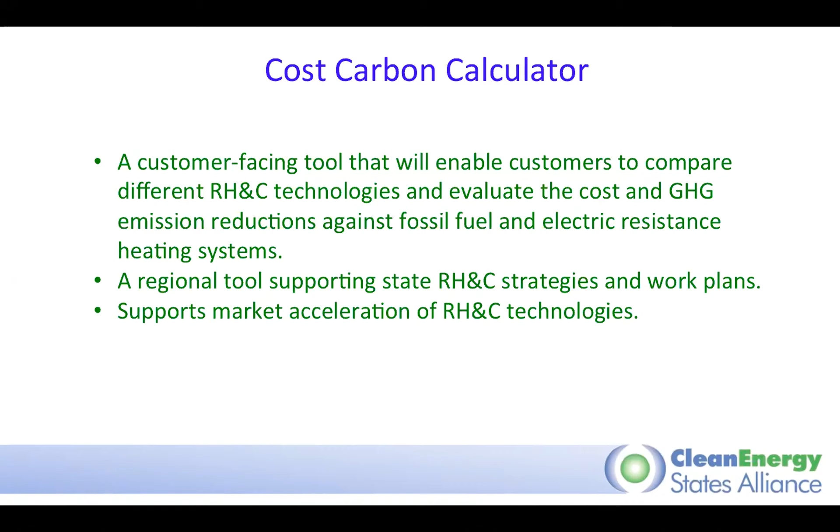The tool primarily, we think, is going to first be used in what are known as Heat Smart or Thermalize community campaigns. And those campaigns, if you haven't heard of them before, are based and built on the very successful and popular Solarize campaigns, which are outreach strategies that tap into the power of communities to increase consumer awareness and then help reduce installation costs and often offer a bulk purchase cost to equipment.

And so some of our members, particularly New York, NYSERDA, and MassCEC, have launched either what they're called Heat Smart, or in New York, it's called the New York Clean Heating and Cooling Communities. And these communities are working on these community bulk purchase campaigns.

And so the vision is that this cost carbon calculator would first be a helpful tool for these consumers to help them choose what kind of renewable heating and cooling technology would make sense to place in their home. It would also be a tool that installers would be encouraged to use and could approach a homeowner to help them compare the costs and the benefits, the carbon reduction benefits of installing a renewable heating and cooling appliance in their home.

The tool will have various inputs and assumptions, and since we're just getting started on this work, we still have yet to figure out whether we will have one set of inputs and assumptions across the region, or if we can make the inputs and assumptions different for different regions and different states. And so the group will be working together and will be working with one or more consultants to develop the tool.

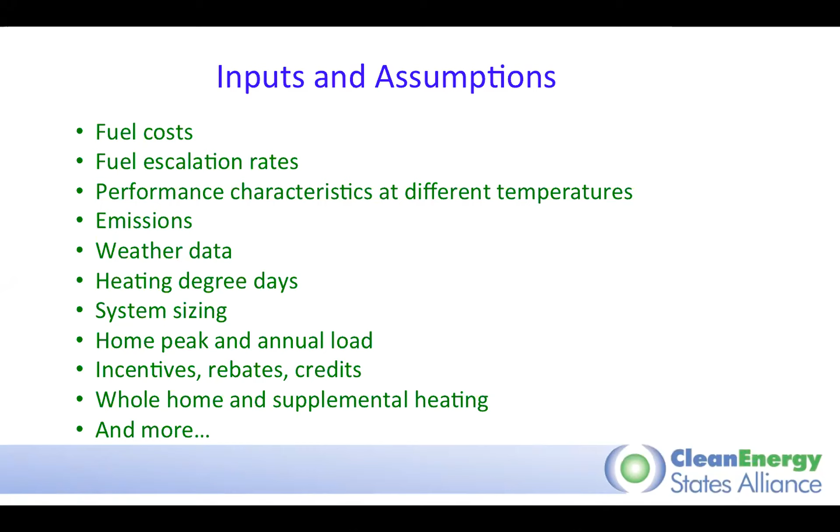So anyone will be able to go online, enter some variables like the size of their home, the current heating system they have, how much it costs to currently heat their home, and to help them choose what kind of renewable heating and cooling system might make sense for them to install. So we really see this as a tool that will help accelerate the market adoption of renewable heating and cooling technologies. So that is our proposal and our project in a nutshell.

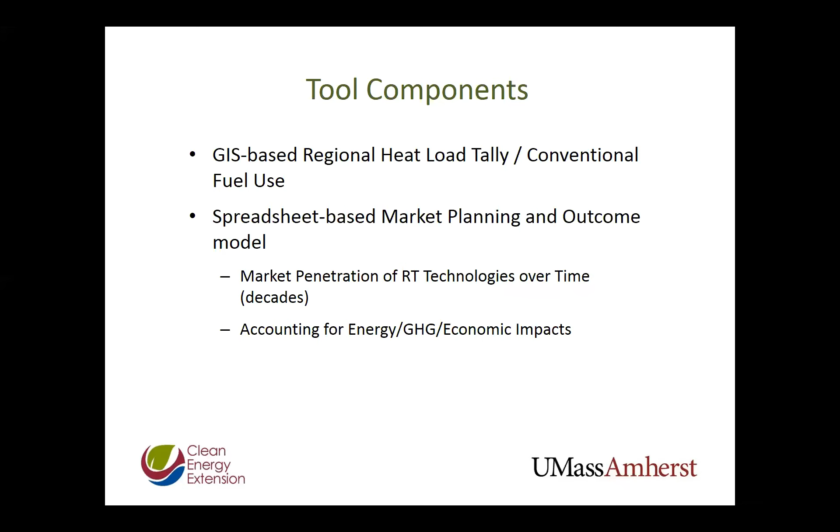First is really outside the Excel model itself: what we have currently is a GIS-based methodology to look at a region and tally up the heat load across different building sectors in that geographic area. And then a spreadsheet-based market planning and outcome model that looks at the market penetration, exogenously input by the user, that wants to be assumed for the region over time, and then an accounting of what that means for different technologies for energy, greenhouse gas emissions, and economic impacts.

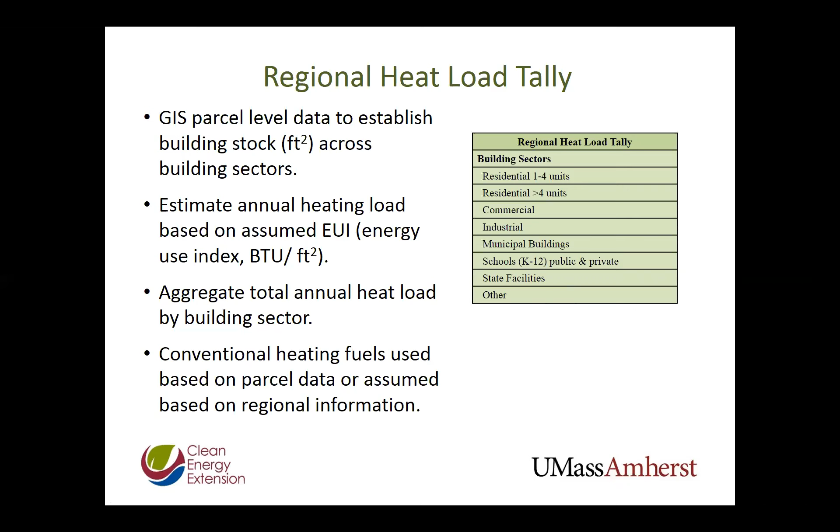Just briefly going through this, the regional heat load tally looks at parcel-level data from GIS and estimates heating load from those various building sectors and aggregates those to come up with a total heat tally for that geographic region. We currently do this with GIS. We want to make that a little bit more template oriented, so anybody can essentially get through that process.

Let me first talk about the treatment of market penetration in the spreadsheet model. The model applies a user-specified or exogenous market penetration. It's really a what-if tool. That is not a prediction of market penetration, but what is the outcome for the region if we go forward with market penetration of so much of different types of renewable thermal technologies into these building sectors.

The model currently is, I would say, limited to two renewable thermal technologies, aggregated together. One is heat pumps. And I'll get to what we plan to do to extend the model, but at this point we have the heat pumps aggregated into a single type of heat pump based on a COP. Second is wood heating. Modern wood heating, differentiated by chips, bulk or bagged pellets. And also, at least for the purpose of Massachusetts and greenhouse gas accounting, whether the feedstock is coming from residues or thinnings.

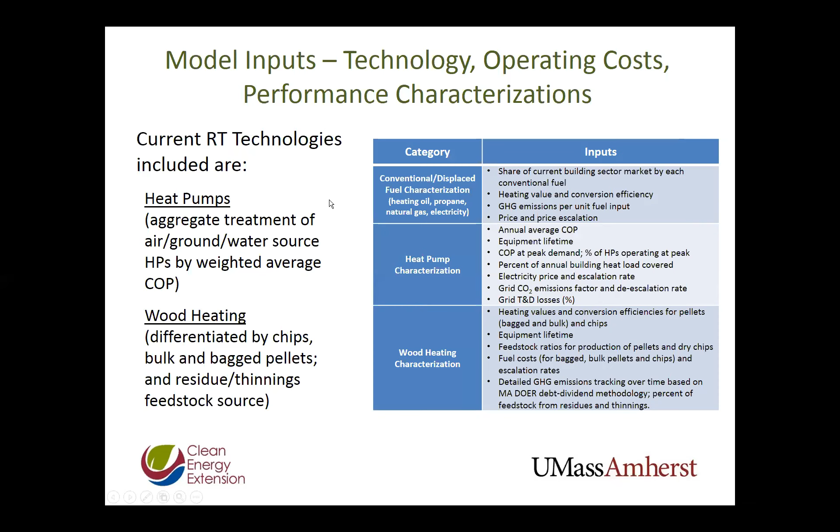This gives a list of the inputs that we take information on. The outputs of the model on the heat pump side are the electric use resulting from the heat pumps, and the aggregated electric peak demand. That is an issue that regions and states need to be aware of and concerned about with regard to electrification. For all the benefits it does have, it also raises concerns about increased electrical peak demands on the coldest of winter days.

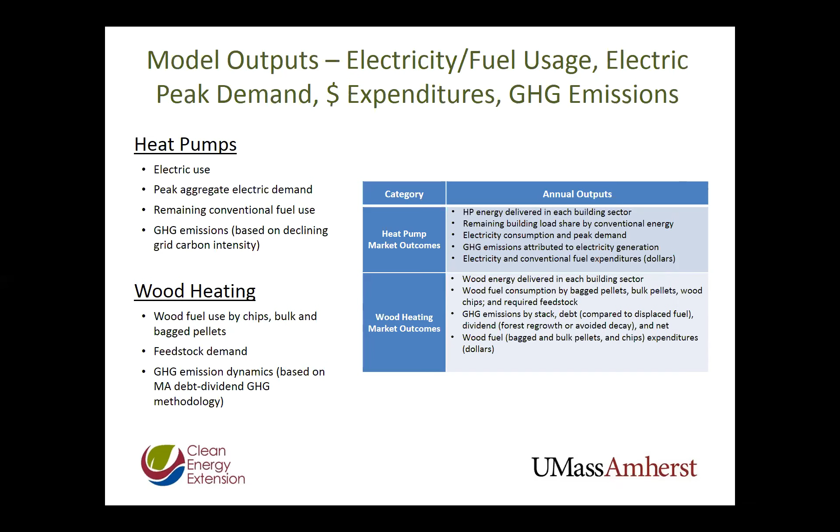It tracks how much remaining conventional fuel is used if the heat pumps do not fully provide the heating of the buildings, and calculates greenhouse gas emissions, taking into account a user-specified declining grid carbon intensity. On the wood heating side, the model looks at the fuel use to provide the heating for the market penetration of modern wood heating systems, the feedstock demand to feed that heating supply, and the greenhouse gas emission dynamics based on the Massachusetts methodology for the debt and dividend of greenhouse gases.

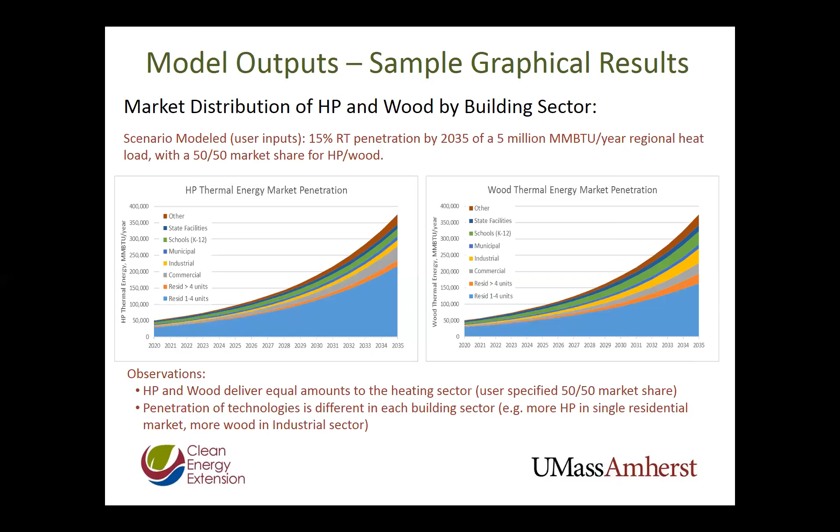Again, in the way Massachusetts looks at it, the heat pumps have more substantial greenhouse gas savings, particularly as the grid gets greener. Wood energy has more initial emissions, but as the dividends pay off from the decay or regrowth, you get benefits further into the future. Just something to inform communities about as they look to make decisions on how to move forward.

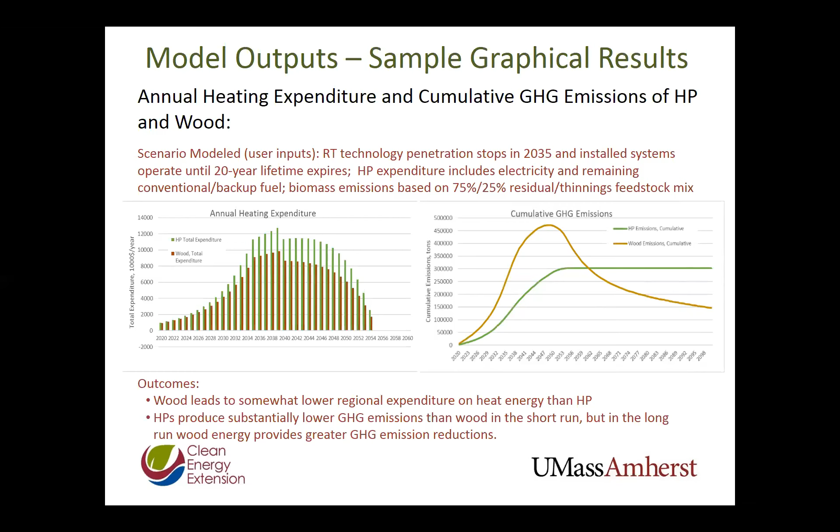In terms of the work that we look forward to do with the RTA funds in terms of enhancements to the model, we really look to simplify and standardize this GIS-based regional heat load tally. We'll work on that. We very much look to differentiate the heat pumps so planners can separate out air source heat pumps, ground source heat pumps, even water source heat pumps. We do want to add solar thermal as well.

At this point, we don't have capital costs associated here, but we want to integrate capital costs so we can project the regional capital spending associated with the renewable thermal technologies. We want to enable users from different states and for different methodologies to treat greenhouse gas emissions, particularly from wood energy, in different ways. And we want to make a user-friendly platform and enable third-party and public use of the model so that folks from the RTA community in other states can make use of this as well.

We do really also look for this model to then provide input to a regional economic impact model, be it IMPLAN, most likely, or REMI. We currently have work going on in that area with a professor at UMass here, but we want to make it a bit more of a method to take the output of this model to prepare the input that would be necessary for IMPLAN, for example, to then extend this analysis for regional planners to look at the local economic impacts in terms of jobs and income, regional product, and so forth from these different renewable thermal potential futures.

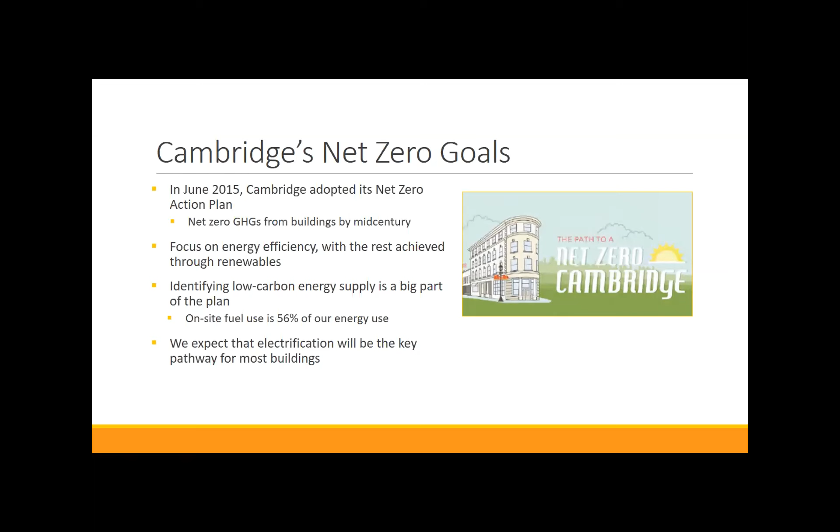But for most buildings, it's going to be individual electrification that's the key strategy. So we had the opportunity about 2 years ago to have a summer fellow focus on some of this work and identifying early opportunities for renewable thermal. Some of his work included looking at the technologies and benefits for Cambridge homes, looking at the types of heat pump technologies that would be most relevant to the building stock here, and some of the benefits.

So comfort and cooling is a big part of this. A lot of buildings in Cambridge have older heating systems, and far more buildings here lack central AC. And especially as we have warmer and warmer summers, comfort and cooling and human health will be an important benefit of air source heat pumps.

We'll also see greenhouse gas savings from a transition to mini splits and to air source heat pumps. So even with the current grid mix, as we heard from some of our other presenters, air source heat pumps are a far cleaner option than oil or natural gas heating systems. And then for some buildings, we'll see cost savings.

So given current natural gas prices, the competitiveness of air source heat pumps on the heating side is sometimes difficult to ascertain, but on the cooling side, we do understand that a lot of window AC cooled homes waste a tremendous amount of electricity and therefore money on inefficient cooling systems, and a transition to mini split cooling can provide an opportunity for savings on the cooling side.

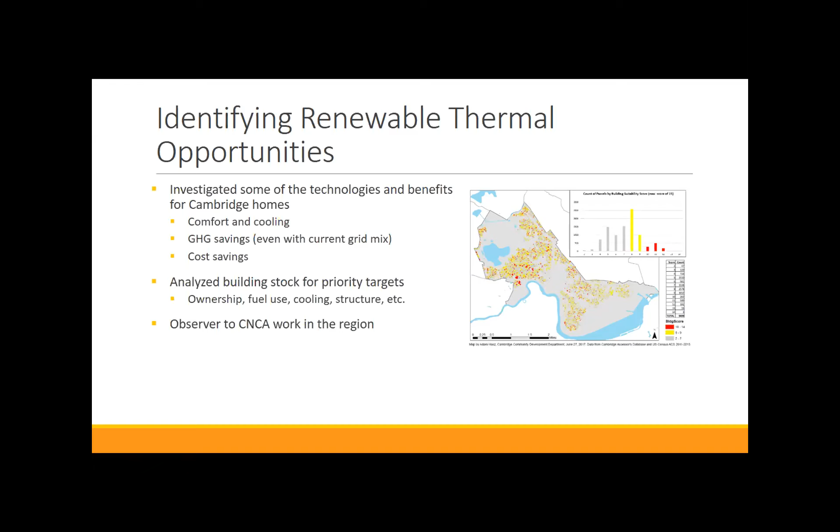So far we've had a chance to really just get a broad sense of some of the opportunities for renewable thermal here. But so what are some of the challenges? So of course there's timing. We need to be able to provide a solution for homeowners when they're ready to replace their old system. We could present this great technology, and we could hear from a lot of homeowners that they still think they have 4 or 5 years before they replace their heating system.

And at the same time, the flip side of that coin is that we understand from our research that about 75 to 80% of heating systems, at least in the residential sector, are replaced on an emergency basis when the boiler fails in the middle of the night, kind of thing. Second, there's also lack of awareness about heat pumps and what these things do. People have heard of them, but they aren't really sure about the costs, about how they're installed, whether or not they offer cooling and heating.

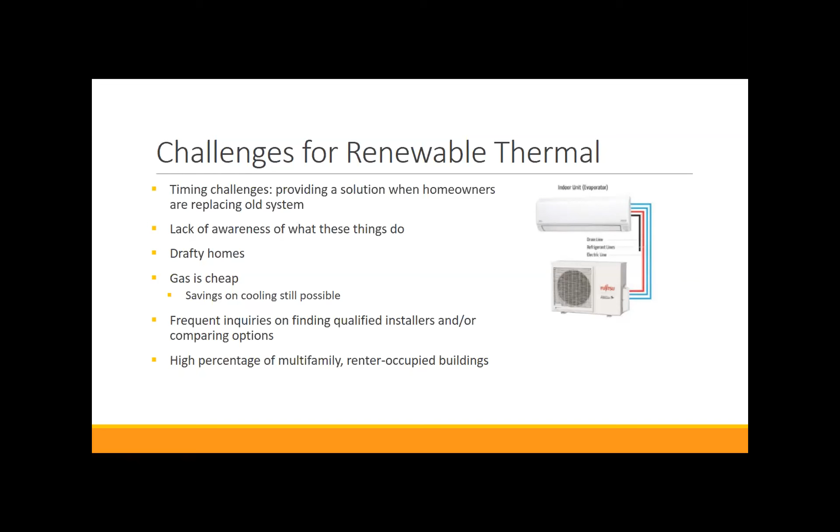And the last sort of challenge that we see is we have a high percentage of multifamily renter-occupied buildings. So we wanted to look to the success of our SunnyCambridge campaign for lessons on how we might be able to support renewable thermal here. So Sunny Cambridge was a successful campaign that we started in 2016, and the platform is still running today. It's still part of our offering.

And basically, we worked with EnergySage to help residents connect with a marketplace of installers. And the results of the campaign and platform to date have been nearly 500 kilowatts installed. So there's just one of the screenshots on the right of the platform, but basically you can see that the Energy Sage marketplace allows homeowners to compare quotes from different solar installers. There's a profile of each of them, their reviews, so homeowners can get a sense of each installer's experience.

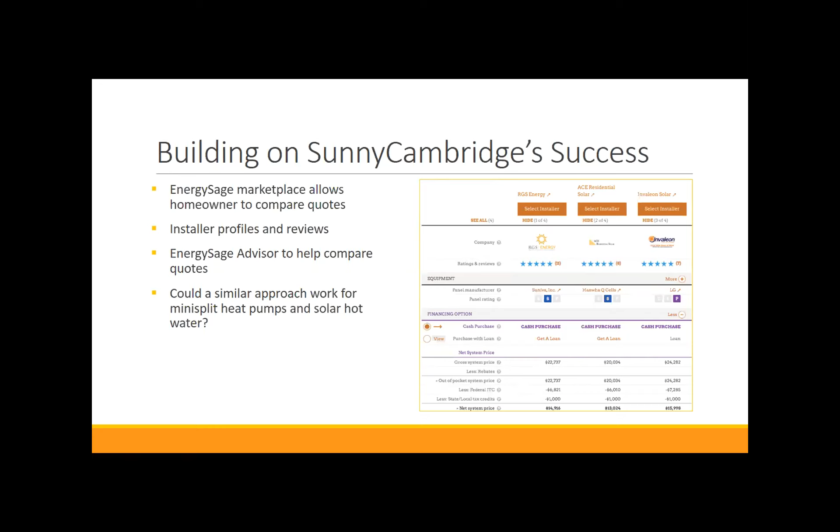And then if they have further questions, they can contact Energy Sage through email or phone to help them compare quotes and understand some of the technical differences. So the question that came up for us was, could a similar approach work for mini split heat pumps and solar hot water?

So to provide you a bit of a project overview of the clean heating and cooling marketplace, our goals are to help Cambridge residents learn about air source heat pumps and solar hot water, to help them connect with qualified installers, and then to help them compare their options. We focused on these two key technologies, as looking at our building stock, we felt that these were the most relevant to help homes here. And to date, we've worked with Energy Sage, and they've interviewed installers to collect some educational material and learn about the different technologies out there.

So I'm going to provide an overview of some of the key project components here. So first, as I mentioned, is education and information. We want to help residents understand which technologies might be best for their home. We want to share how these technologies work and communicate typical costs and benefits. So there would be an educational component to the platform where people would arrive first so that they can really get basic questions answered.

Second, they'd be able to then use the platform to connect with installers. So Energy Sage is engaging local installers for both technologies. We're also going to be looping in Mass Clean Energy Center, as they've done a lot of engagement in this space. We'll then be creating program rules and agreements to ensure that the installers are responsive to customers that come into the platform. And we'll also make sure there are installer profiles and reviews for customers.

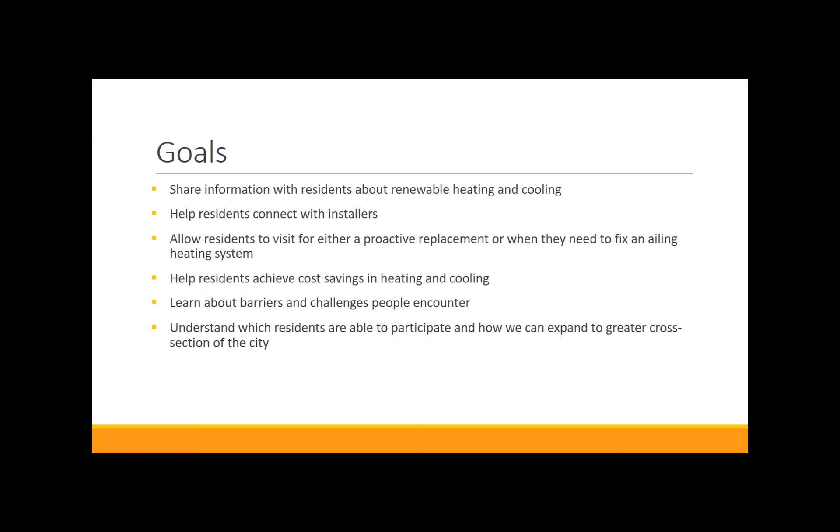So I have one. Do you have any thoughts on how this marketplace can scale from Cambridge to the region? How easy would that be? Yeah, sure. I think it's an approach that certainly could work in other communities. Of course, I think as we engage installers here, that would need to be a parallel effort in another community to get local installers on board.

Okay, thank you. And while Matt is presenting oTherm, I thought that all speakers could think through whether there is something that the RTA community could contribute, or how can your project benefit from the RTA community. If we have time at the end, we'll just do some discussion on that.

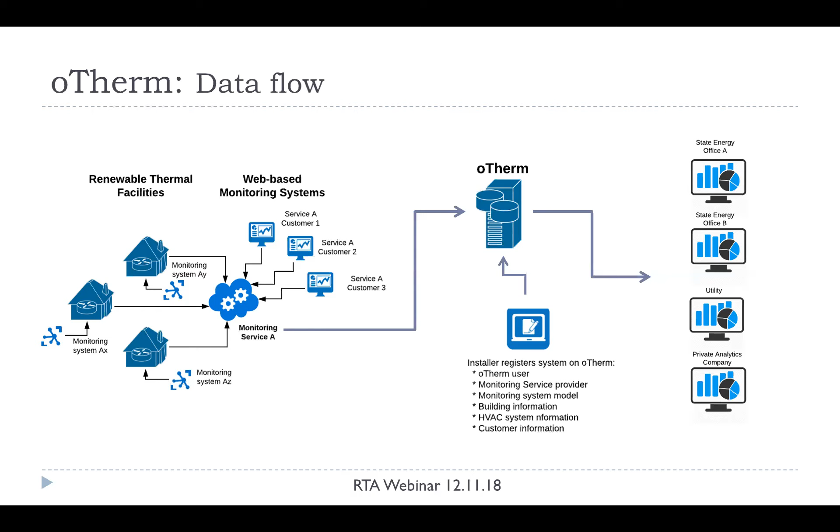So to pull this off, there's a number of challenges. One of them is that we need a data model that is well thought out and has some capacity to both take on all that has been learned and also have some capacity to grow. And there's this project that has been developed and maintained by NREL and the Home Performance Coalition.

It's called HPXML. The XML stands for extensible markup language, which is a data exchange protocol. And the HP stands for home performance. So this is a data schema that has been developed to look at home performance largely around the energy system of a home. And currently there are 4 special use cases, and we propose to add more that would be related to renewable thermal. And each renewable thermal technology will probably end up having its own use case. There will be some similarities, but also there will be some unique elements.

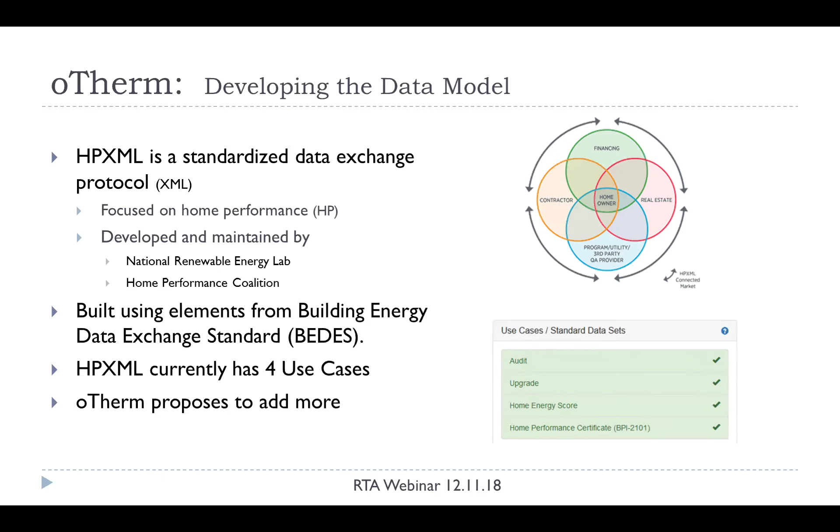So this HPXML is something we need to get our hands around, and it has essentially these 6 different elements about the customer, the contractor, the building, the project, utility, and consumption. And it's fairly massive. This is a sort of schematic of some of the elements that have been extracted and put together, and you have these different branches that expand, and there's a lot of details in this. This gets down into individual lighting technologies and a lot of stuff that we may not need, but actually there's a lot of stuff in here that I think we will need.

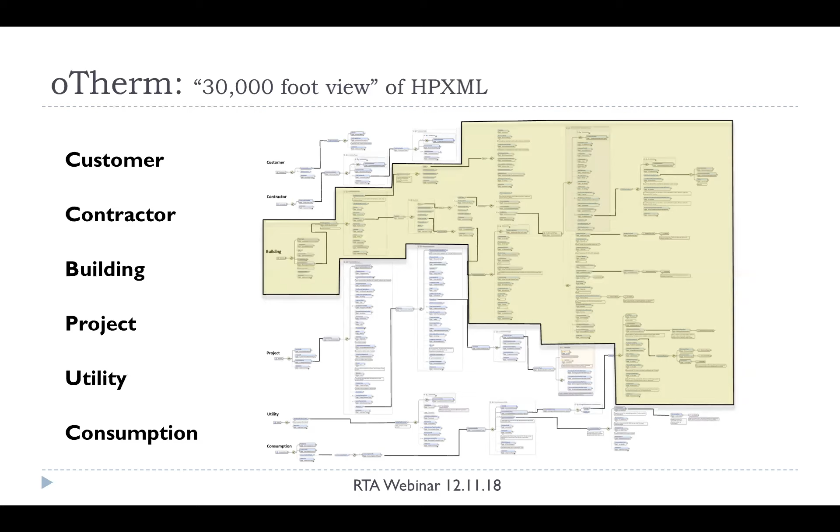And if we just look at the building part of this, there's a lot of things that need to be worked out here. So one of the challenges in this project is, how do we manage collaboration? How do we manage a discussion around something that is this complex, where each element needs some level of discussion? And so what we're doing is we're building a tool that will help us manage that collaboration.

So the schema itself has about 1,300 data elements. I would envision that the renewable thermal technology use cases will likely have several hundred. And so the RTA Innovation Grant is largely being used to develop this tool that will enable us to work collaboratively on this schema so that we have it properly structured, properly documented, and that it's accepted by the community. And then we would propose that as a new use case to the HPXML working group, which I've recently become a member of.